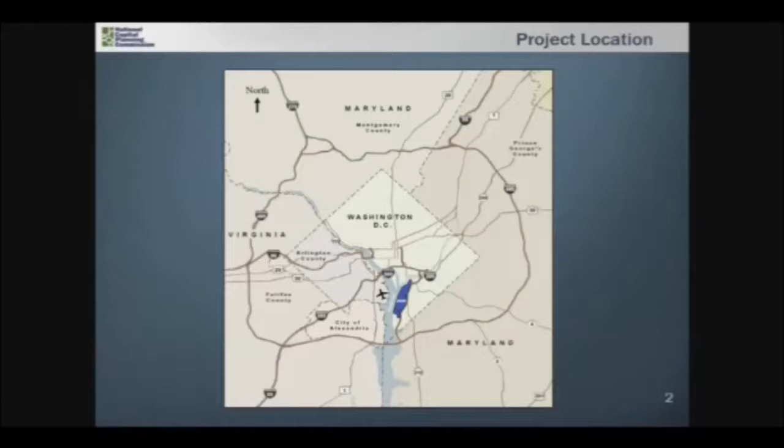The draft master plan was developed from the Long Range 2035 Regionally Integrated Master Program, also called RIMP. The RIMP was developed by the Naval District Washington in 2009 to provide an integrated set of regional strategies for its installations throughout the National Capital Region. These long-term strategies form the foundation for each of the installation master plans currently undergoing development and currently in various stages of NCPC review.

So the master plan starts out with a vision statement to serve as a premier installation, providing superior customer service and administrative mission support for DoD activities in the National Capital Region and worldwide, and also to evolve the installation into a more sustainable community.

The master plan is based on multiple guiding principles for sustainability, including compact development, multimodal circulation, energy conservation, and sustainable landscapes. And these sustainable principles are based on the Unified Facilities Criteria for Master Planning, NCPC guidelines, and other various federal mandates related to climate change, stormwater management, and sustainability under Executive Order 13514 and the 2007 Energy Independence and Security Act.

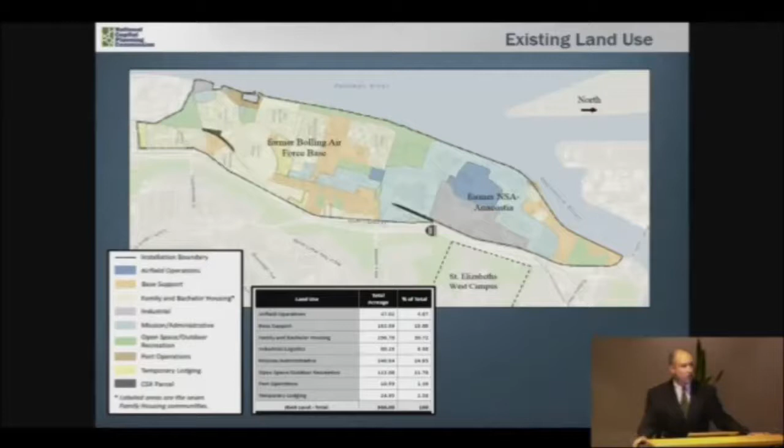The installation was merged back in 2010 pursuant to a 2005 Base Realignment and Closure Act. It's made up of the former NSA Anacostia, which was located in the northern portion of the installation, and the southern portion of the installation was the former Bolling Air Force Base. And so those 2 discrete installations merged, forming Joint Base Anacostia Bolling.

So in terms of actually accessing the installation, there are 5 gates. The northernmost gate is known as North Gate, located in the vicinity of the South Capitol Street Bridge. Currently, that gate is not operational. Moving south, there's Firth Sterling Gate, which is for employee use only, currently during business hours, 7 days a week. Arnold Gate, which is considered to be the main gate, is used for employees only, 24 hours, 7 days a week. The South Gate is for use by employees and visitors, including commercial vehicle traffic.

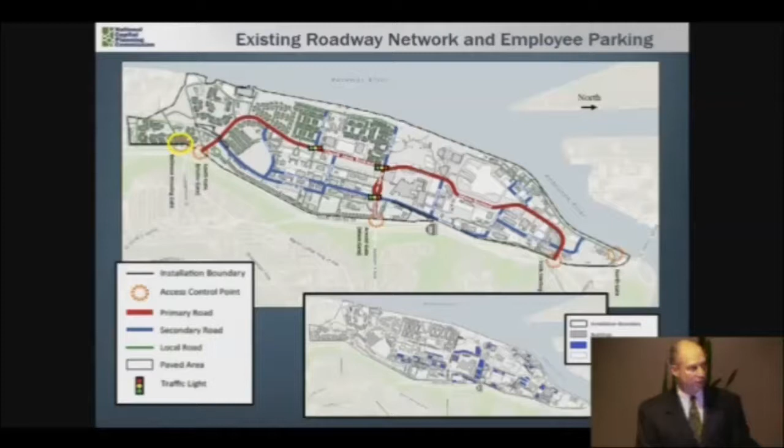And the very southernmost gate is for visitor and residential use, providing access to the privatized Bellevue housing complex, which makes up the very southern portion of the installation.

In terms of existing transit, currently there are 6 or 7 transit routes that provide service throughout the installation, operated by the Navy and various other tenants on the installation. These routes also provide service between the installation and several off-site locations, including the Anacostia Metro Rail Station, the Navy Yard, and the Pentagon.

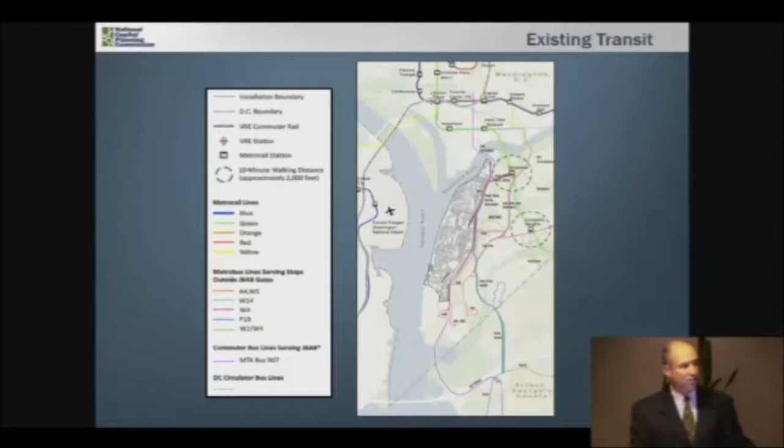Outside of the installation, there are several Metro bus routes with stops along the installation's edge at several of its gates. The 2 local Metro rail stations are Anacostia, which is located approximately a half-mile up Firth Sterling Avenue from that gate, and Congress Heights Metro Rail Station, located approximately 1.5 miles to the east of Arnold Gate.

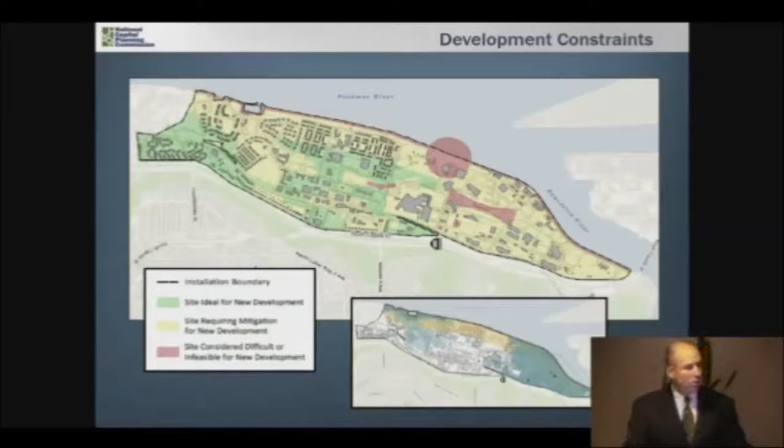A little more planning context. JBAB's current employee population is listed at 13,811 employees. The master plan assumes this employee population will not increase over the next five years. JBAB currently has 8,259 employee parking spaces, giving the installation a current overall parking ratio of 1 to 1.67.

Part of the need for the master plan was that the waterfront levee is currently in need of rehabilitation and recertification. One of the things the master plan seeks to do is get attention for that potential future project, which is currently unfunded. However, that is listed in the next five years, and you'll see that in a later slide.

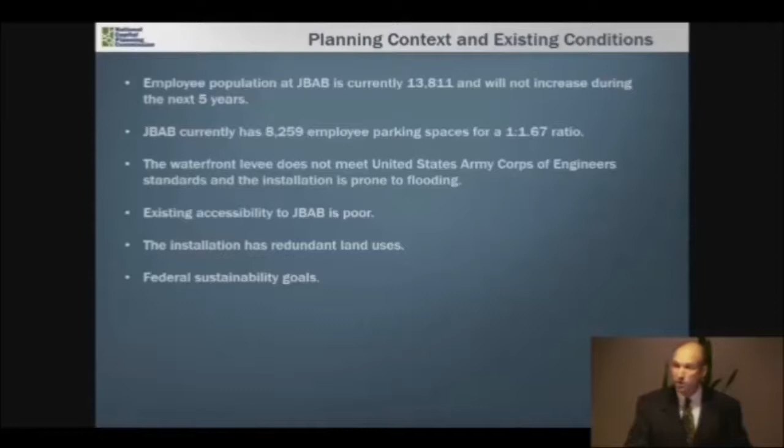Another issue facing the installation is that its land uses can be made more efficient. There are several redundant land uses between the north and south portions of the installation, reflective of the previous separate discrete installations that were merged together. One of the things the master plan seeks to do is eliminate that redundancy in the land uses.

And lastly, there are several federal sustainability goals coming up, and the master plan is designed to help the installation attain those various sustainability goals.

So as I mentioned earlier, there are two components to the master plan. I'll start with the shorter-term five-year development program first. The master plan shows a series of future demolition and construction projects over the next five years.

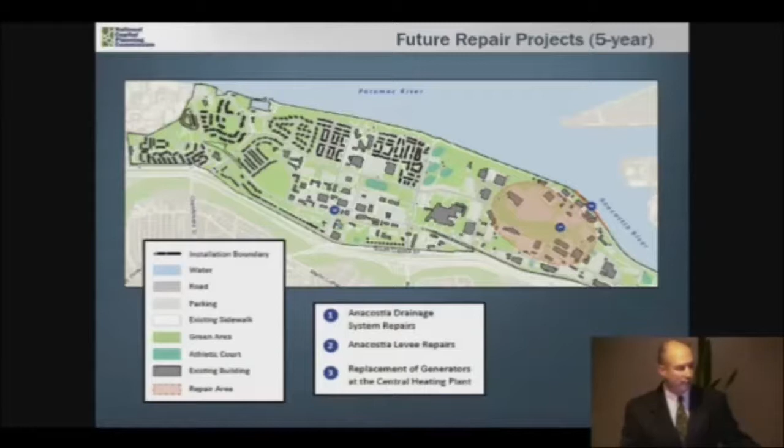The master plan shows a 10% reduction in employee parking over the next five years, which would improve the parking ratio from 1.67 to 1.86.

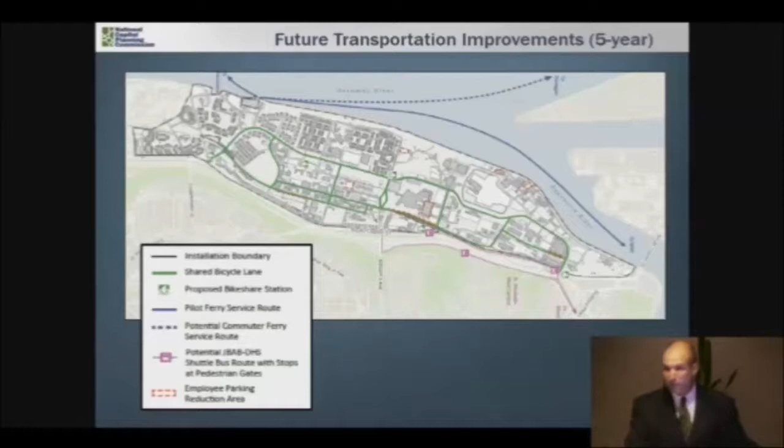The master plan lists a number of short-term five-year transit improvements, including a shared bicycle lane network, several proposed bike share stations, a pilot ferry service that would dock at the JBAB Marina, and also a potential future shared shuttle route between St. Elizabeth's and JBAB and the nearby Anacostia Metro Rail Station.

Now I'll go through several key features of this future land use plan. As I mentioned previously, there are a number of mixed-use areas, intended to make it easier to locate uses together that will help improve local connectivity on the installation and promote biking, walking, and transit use.

The land use framework plan shows a central development focus area in an attempt to densify and increase the mix of uses around the installation's existing central business district. The land use plan also reflects a 200 to 300 foot wide waterfront open space greenway extending from the very northern tip of the installation, adjacent to the South Capitol Street Bridge, all the way down to the JBAB Marina.

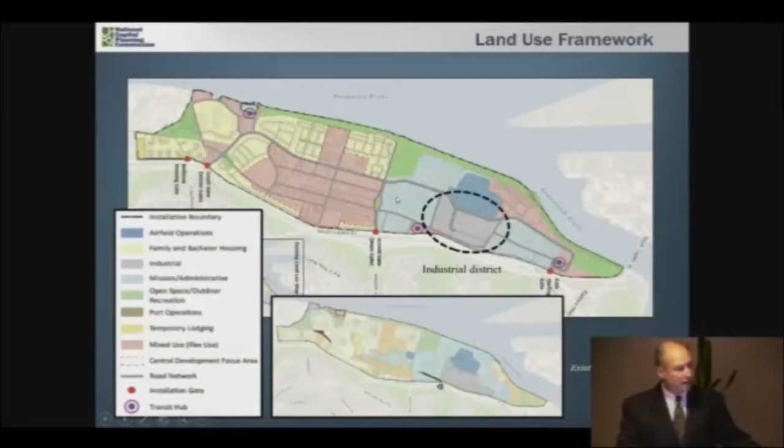There's a consolidated industrial district, and consolidated housing in the north.

In terms of the framework plan's access and circulation framework, there are a number of strategies included in the plan. The first strategy is to improve the installation's interface with its surrounding neighborhood, with four planned, unfunded gate improvement projects in the long-term framework plan component.

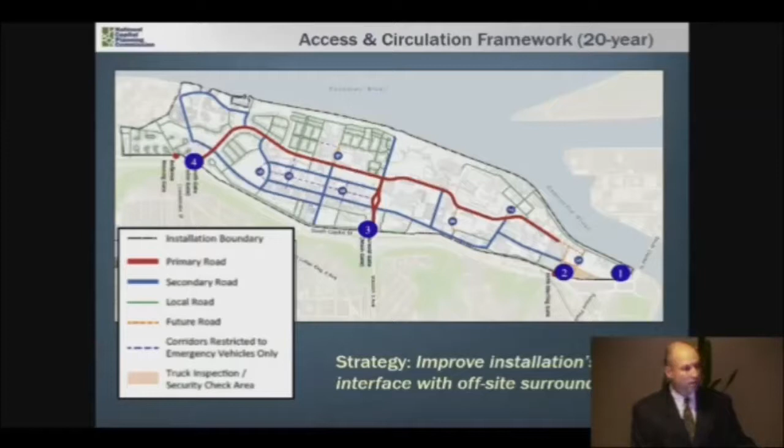The plan includes a strategy to strengthen the internal roadway network into more of a grid pattern, and the master plan reflects this attempt through a series of four roadway extension projects. The intent is to improve east-west accessibility on the installation, waterfront access, and make it more pedestrian and bicycle friendly. The last strategy included in access and circulation is to restrict vehicular access along several routes to bicycles and pedestrians only throughout the central development focus area, to improve urban design and walkability.

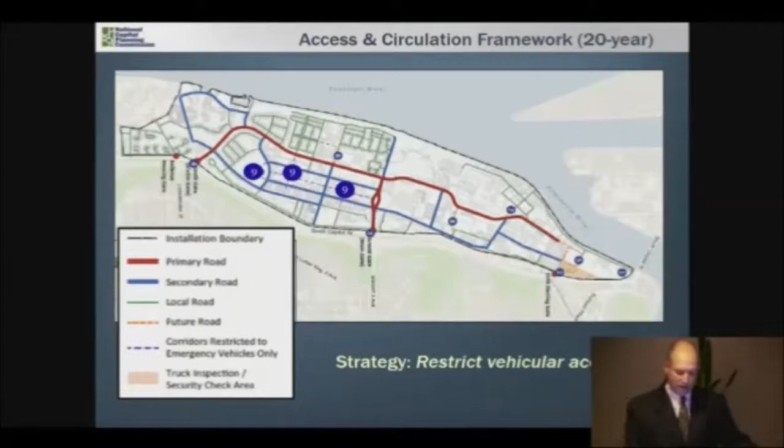The 20-year framework plan includes a multimodal circulation component. This not only includes the previously mentioned 5-year projects, it also adds DC streetcar service, potential ferry water taxi service which would dock at the JBAB Marina, and a much more robust potential internal shuttle service operating at 15 to 30-minute headways. This multimodal circulation component shows three identified multimodal transit hubs to improve mobility and accessibility throughout the installation and between the installation and the surrounding neighborhood and city.

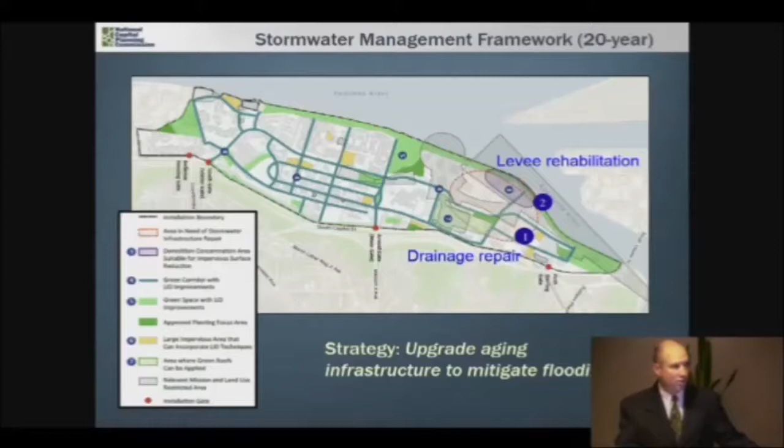The stormwater management installation-wide component includes a number of strategies to upgrade the aging infrastructure found in the southern portion of the installation, by repairing the underground sewer and stormwater system and rehabilitating and recertifying the levee. It includes a strategy to promote a more integrated natural system with green infrastructure consisting of green streetscapes, retrofitting large parking areas with low-impact development features, relocating some existing buildings currently located close to the waterfront further inland, and possibly retrofitting some larger industrial buildings with green roofs, as shown by number 7.

In terms of open space and outdoor recreation, this component includes strategies to be implemented by specific planned long-term projects: creating a green space area in the very southern portion of the installation, reconnecting the levee trail so it's a continual trail all the way from the northern portion of the installation down to the marina, and enhancing a network of streetscapes to encourage walking and biking throughout the installation.

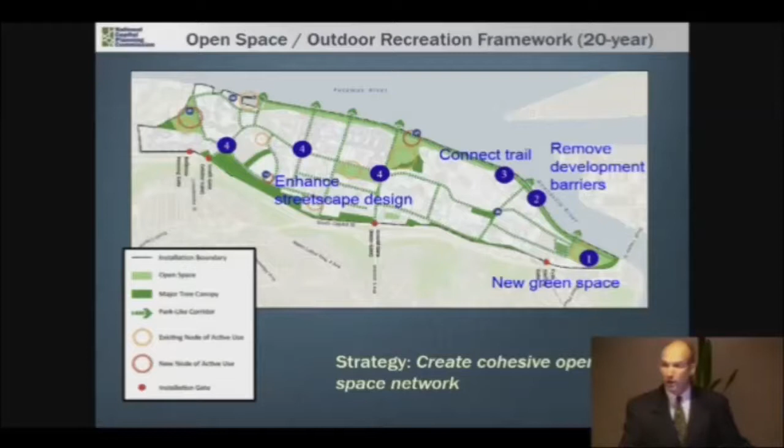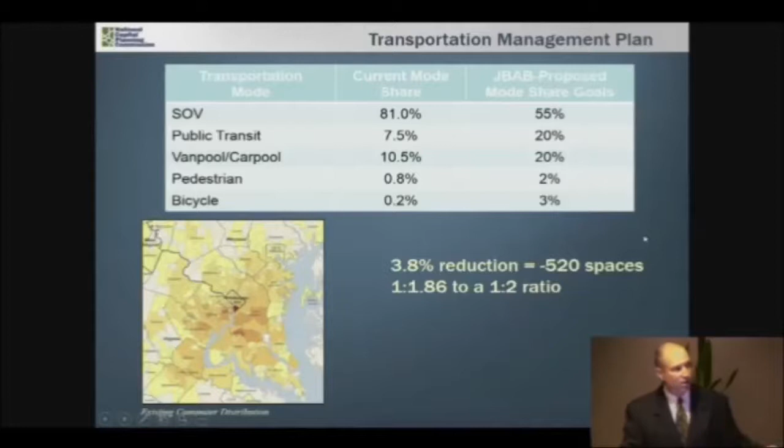So the master plan submission included a draft transportation management plan. The TMP proposes a long-term one-to-two parking ratio goal for employees. The TMP shows a number of existing mode shares for JBAB employees. You can see that a vast majority of JBAB employees currently commute using single occupant vehicles due to the spread of where JBAB employees live throughout the region. The TMP proposes a series of mode share goals in order to attain a long-term one-to-two employee parking ratio. For example, the TMP proposes to reduce the 81% SOV mode share down to 55% and to increase all the other non-SOV mode shares.

Staff analyzed the TMP and master plan. NCPC has review authority over the master plan pursuant to the National Capital Planning Act. Staff used the NCPC comprehensive plan as a tool to weigh the master plan and TMP against these comprehensive plan elements, and staff divided its analysis into three different categories.

The first set of my analysis will address the master plan's organization and structure. The second portion will address the short-term component. And the third portion will address the longer-term 20-year component. Just to give you a heads up, the executive director's recommendation follows this same structure, categorized using these three different groupings.

So staff strongly supports the master plan organization in its two component parts: a shorter term 5-year component, which includes funded and soon to be funded, likely to be funded projects, as well as a longer term 20-year component to provide guidance for the shorter term development program. Staff also supports the general framework plan strategies, many of which are based on these sustainable strategies shown before you.

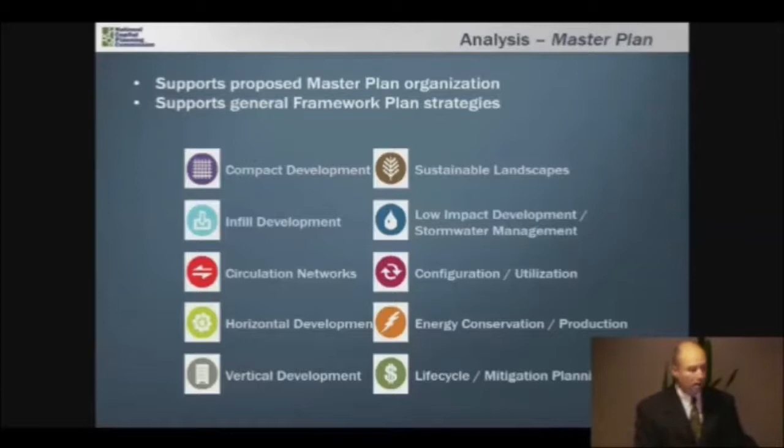In terms of the development program, staff notes a zero growth employee population assumption. Staff notes that the master plan proposes a 10% employee parking reduction in the short-term 5-year component, and that this short-term component does include both funded and likely to be funded projects.

Lastly, staff strongly supports the reconstruction and recertification of the waterfront levee, since it has a big impact to future costs of future development on the installation.

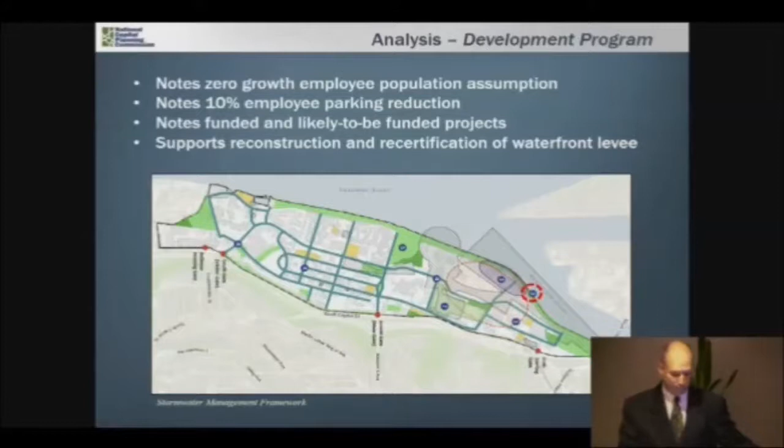In terms of the longer-term framework plan, staff strongly supports many of the strategies, including the establishment of a 200 to 300 foot wide waterfront buffer area, establishing a central development focus area, establishing an area set aside for community gardens, and the master plan and TMP both include a number of comprehensive travel demand management strategies and programs. There were a number of other elements as well that staff really recognized, leading to a fairly strong master plan.

However, staff does not support the proposed TMP's long-term 1-to-2 employee parking space ratio, based on a number of reasons.

This part of the city has a lot of planned developments and planned transportation improvements, and so staff did not feel it appropriate to relax the NCPC recommended 1-to-4 employee parking ratio for this part of the city, and allow the master plan TMP to use a 1-to-2 long-term parking ratio goal.

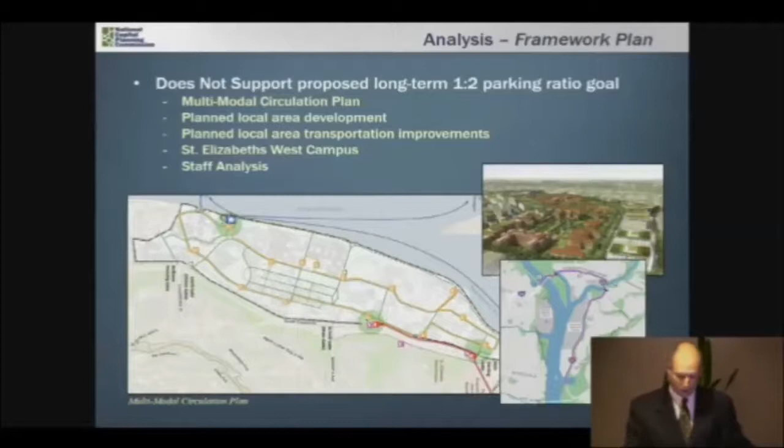Staff had felt it appropriate to include several requests to the Navy regarding the framework plan. Number one, in support of further reducing employee parking, staff felt one potential action that could be taken is to remove all the employee parking throughout the central development focus area, not only to work towards the 1-to-4 parking ratio, but also to improve potential developable area, and also improve the urban design and reinforce the walkability and bikeability of that area.

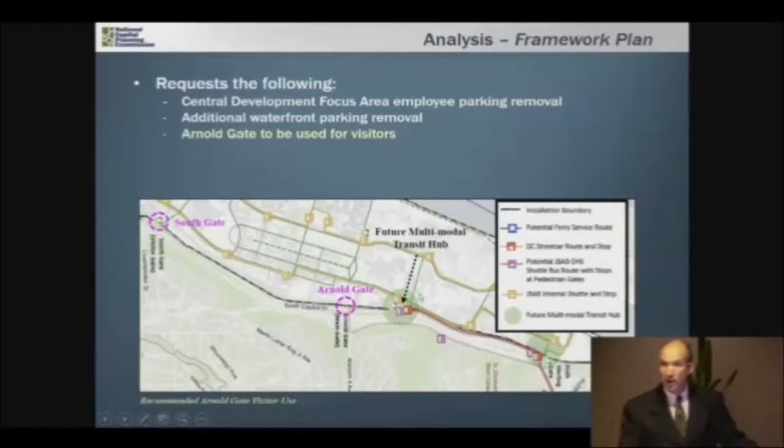Number two, staff felt it appropriate to request that the additional waterfront lot located in the extreme southwest portion of the installation be removed, to further help reduce impervious surface on the installation, and also to further expand the waterfront open space area. And lastly, staff requests that the Arnold Gate be used for visitors in the future rather than South Gate, due to the gate's better proximity to a future proposed multimodal transit hub and DC streetcar service.

Lastly, staff recommends regarding the framework plan, noting that the master plan proposes to relocate the commercial vehicle inspection operation from where it exists today down at the South Gate, adjacent to the Firth Sterling Gate. Staff recognizes that would likely result in an increase of commercial vehicular traffic through that gate, and recognizing that there's a major access point to the St. Elizabeth's campus located right here, a short way up Firth Sterling Avenue.

Staff feels that it's very, very important to continue coordination of this planned project with St. Elizabeth's, GSA, NCPC, and JBAB. Staff also would like to request the Navy continue its travel demand management efforts in trying to attain a longer-term 1-to-4 parking ratio, and recognizes that as a team effort, a coordination effort should include WMATA, DDOT, St. Elizabeth's and GSA, NCPC, and the Naval Research Laboratory.

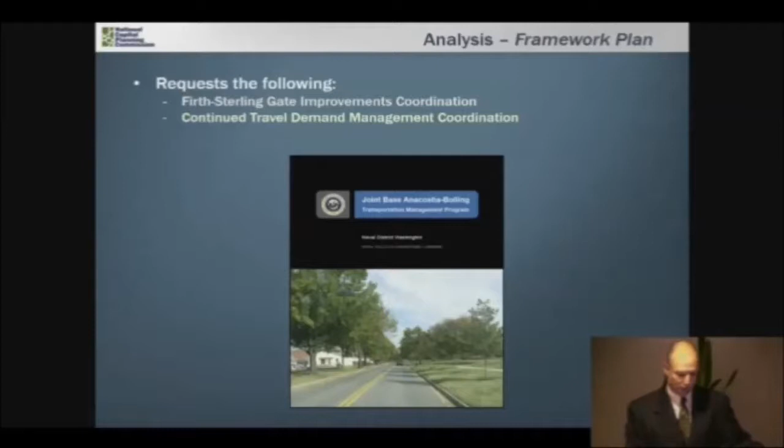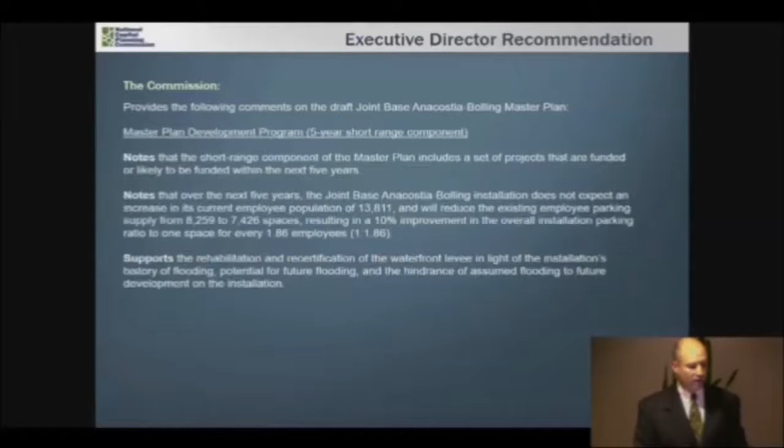So here's the actual executive director's recommendation. I'll kind of fly through these if you don't mind. These are, again, divided up into the same categories. Basically, the executive director supports the overarching organization of the master plan into a short-term 5-year and 20-year component, and also requests continued coordination between the Navy and NCPC from here on into the future.

Staff notes the short-term component includes funded and likely to be funded projects. The executive director notes that the master plan is based on a 0 employee population growth assumption, and that the master plan will work to reduce employee parking by approximately 10% over the short term. Furthermore, the executive director supports the rehab and recertification of the waterfront levee in light of the installation's history of flooding.

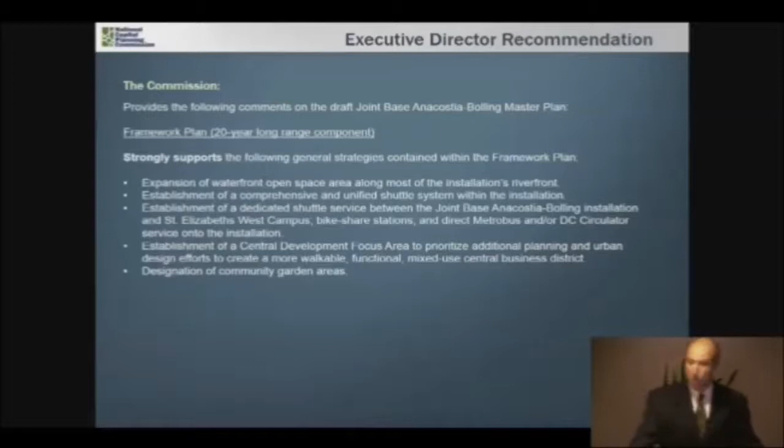The executive director strongly supports the following general strategies to highlight the master plan and its comprehensive nature, including the expansion of the waterfront open space area, establishment of a comprehensive and unified shuttle system within the installation, the establishment of a central development focus area, designation of community gardens areas, and a number of TDM programs, including bike share stations and direct Metrobus and/or DC Circulator service actually onto the installation.

The executive director does not support the proposed parking ratio of 1 to 2 employee spaces, since the master plan and TMP do not justify deviation from the transportation elements prescribed 1 to 4 long-term parking ratio goal.

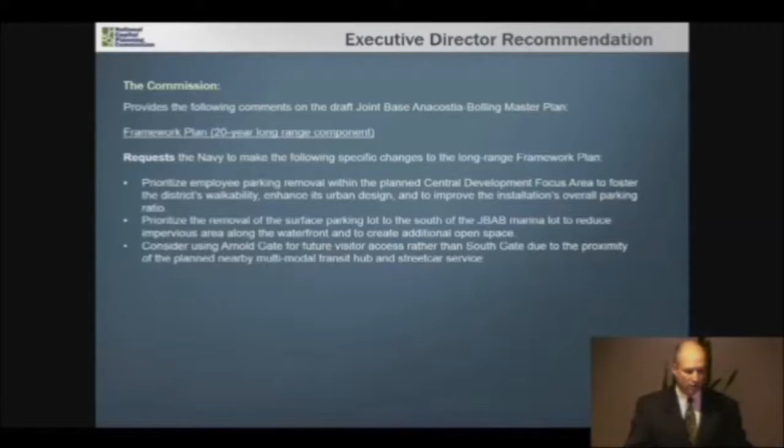The executive director requests the Navy make the following specific changes to the long-range framework plan: to consider using Arnold Gate for visitor access rather than the South Gate, to prioritize removal of the parking lot in the southwest portion of the installation, as well as employee parking throughout the central development focus area.

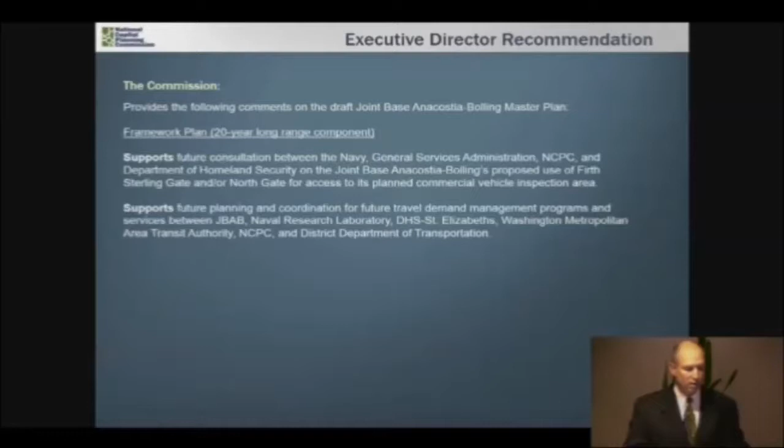And the executive director supports future consultation regarding the potential relocation of the truck inspection facility between the Navy, GSA, NCPC, and St. Elizabeth's. And the executive director supports future planning and coordination for future travel demand management programs and services between JBAB, the Naval Research Laboratory, St. Elizabeth's, Washington Metropolitan Area Transit Authority, NCPC, and DDOT.

And that concludes my presentation. I'm available for questions, and I believe JBAB has representation here as well.

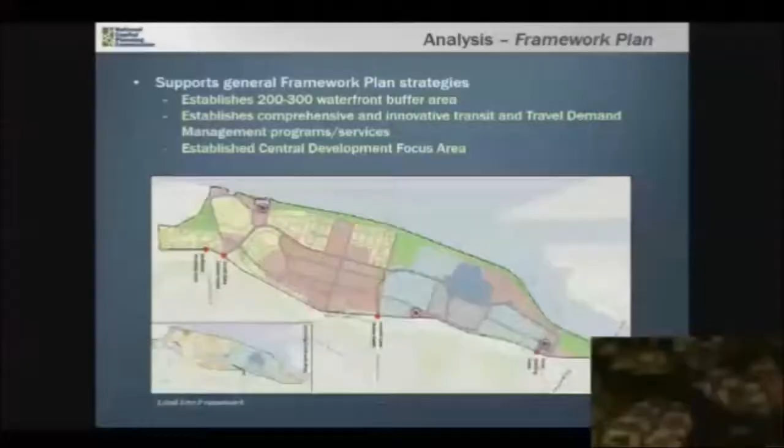Yeah, it's right next to the base. I believe that test line will be incorporated and extended up, included in the streetcar network. And you're right, it crosses South Capitol Street. Show that on the map, so it's easier. The test line definitely crosses South Capitol and goes right along the fence line. In fact, we put in a request to increase the height of the fence for security reasons, a real estate action. And then there's an easement associated with it which we're working through right now.

That's helpful to see. One thing I noted in my review of this report is there's a lot of color that would have been very helpful to see when we reviewed it. It was very hard to review in black and white, so that's a note for staff for future discussions—this color could be brighter. That's true, but this is better than what we have in our black and white.

So are we seeing it there in the lower right where it's coming across along Firth Sterling? Yes, sir, right here. It comes across, and then it goes down to about there, and just dead ends. It's not a station necessarily right there, but it is coming along there, which is why we needed the fence a little bit higher.

So I'm curious about what the ultimate plan is for the streetcar in that area. I know the immediate future of the streetcar is somewhat in question, given the funding situation in the district, although the dust hasn't settled on that yet. But I'd be curious whether it's envisioned that the line would actually extend that far down. I think that would be highly beneficial, given the number of people who work there.

By the way, Lieutenant Colonel, I'm sorry, I missed your name. Kristen Bakotic? Bakotic. So I'm curious, is this your actual workstation? You work on the base? I do, yes, sir. And how do you commute from Capitol Hill? When it's nice out, I actually ride my bike. Excellent, I was hoping for that answer.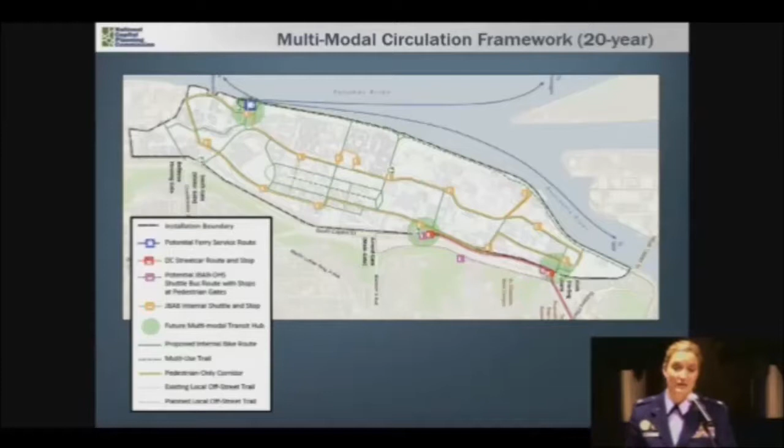I'm a huge proponent of it. It's just a matter of hopefully some of that community development right outside the gate continuing to improve over the next few years. And if we get that bike lane extended down South Capitol, I think it'll be a huge help as well. And I know Berry Farm is teeing up for redevelopment shortly, so that'll be a big improvement.

I've tried to do the crossing on South Capitol Street Bridge, which is not very good. But do you come by 11th Street? Because that is a better crossing. I do both, yes sir. And of course, the 11th Street gives you the opportunity of going through the park as well.

I'll also comment on the path, the trail along the Navy Yard that connects to the stadium, which I rode very recently. It's a great thing to have, but it is tough on bikes at the moment because it's an uneven surface with lots of gaps, and if you're not really watching, you can easily get a wheel stuck in those gaps. That's not your domain, but I think that's the next one.

Right, over to you, Rich. I think that's all I had to say. Thank you very much, I appreciate it. The thing that concerns me most is the levee follow-up. Copy that, I appreciate it. Ms. McCarthy, and then Mr. Provenza.

I was thinking along the same lines as Mr. Hardin, but wondering even more broadly, how realistic is it to even plan on increased investment in this area, given that so much of it is already in the 100-year floodplain at current water levels, with such alarming projections on the effects of climate change? Does it make sense to retain a secure facility here so close to the possibility of being flooded? It's an Air Force base without an airstrip, a Navy base without an airstrip, and without any major docking station. There doesn't seem to be an integral military reason to have it there. Given the hazards, potential loss of investment, and potential loss of life, is it really worth continuing to invest here, or should we think about moving it?

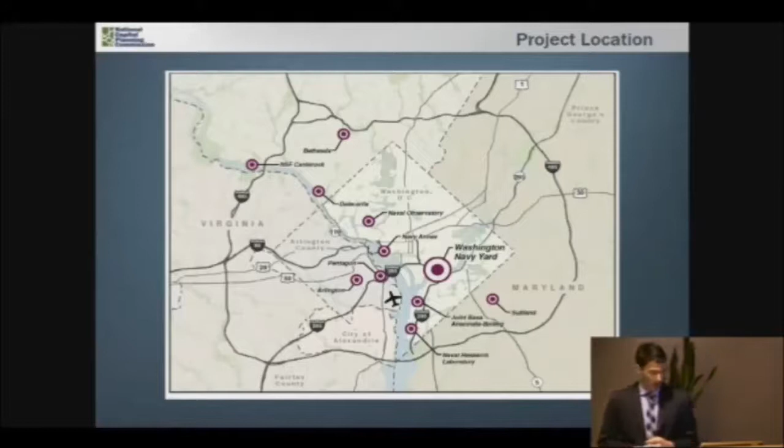You can also see on this map several other dots noting the location of other naval installations, which, as you know, the Navy is undergoing a region-wide installation master planning process, updating several installation master plans throughout the region. Each is informed by a much larger region-wide integrated master programming exercise called the RIMP, which informs individual strategies at the installation level.

Over time, the function, mission, and size of the Navy Yard has evolved substantially since its original inception in the late 1700s. Initially, it was established as a shipbuilding yard and maintenance facility, transitioning over time to a production facility during World War I, research and testing during World War II, and then following World War II beginning its evolution into a large administrative center.

I noted that the Navy Yard at one time was much larger, encompassing the area immediately to the west, which is currently under redevelopment. But in 1962, it was determined that much land was no longer necessary for the function of the Navy Yard, and that portion was declared surplus to the General Services Administration.

Since the 1970s, the Navy Yard has taken on a lot of administrative office space. Beginning in the 1970s, there was a big effort to consolidate lease space onto federally owned land, as noted in the last presentation, and the Navy Yard was one of the installations that received a lot of that office space. In addition, multiple rounds of BRAC also resulted in several employees and a lot of office space being located to the Navy Yard.

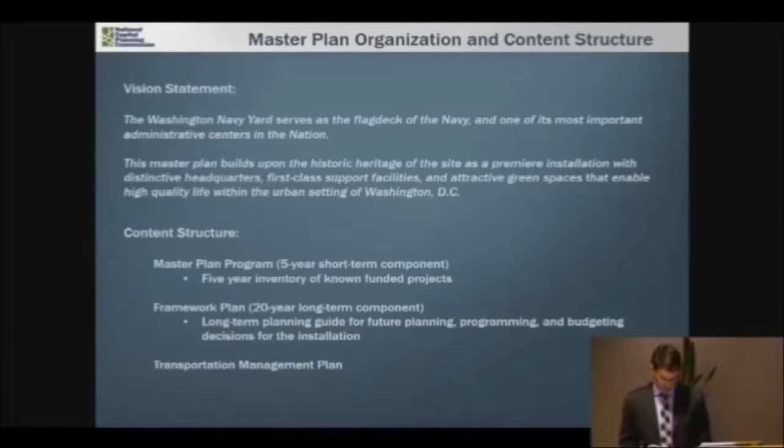The Navy Yard Master Plan is based on the same set of 10 guiding principles as the JBAB Master Plan, so I won't go through those again, as you've already been presented them.

With regard to the overall Master Plan organization and content structure, you'll note in our EDR that staff is very supportive of this. We think the 5-year short-term component gives the Commission a good idea of what to expect in terms of specific projects coming forward for review. And the long-term component provides the commission with a really good overall context with regard to the long-term vision for the Navy Yard and how it'll guide future planning and budgeting decisions.

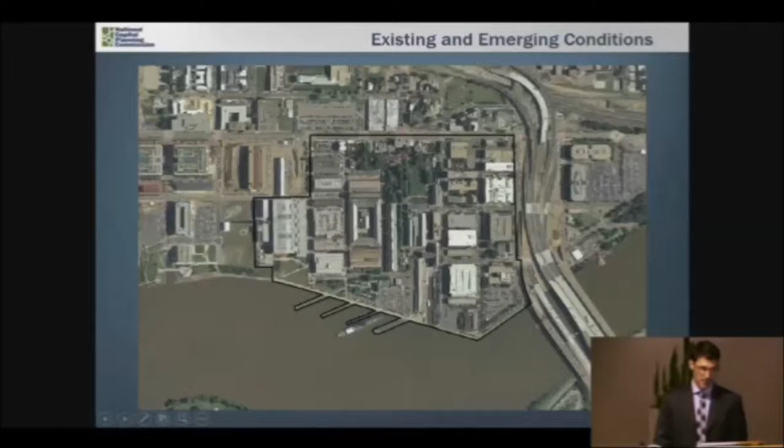Generally speaking about the surrounding development pattern of the neighborhood, the surrounding neighborhood is evolving substantially. A large mixed-use neighborhood is being developed to the west. You have Capitol Hill immediately to the north, and to the east, there's some development going on by Maritime Plaza for some conference space and hotel space that'll be located at the foot of Virginia Avenue.

Currently the Navy Yard is primarily an administrative center. Administrative office space composes the largest percentage of land area at the Navy Yard, being approximately 35 or 36 of the 79 acres that make up the base, approximately 46% of the installation.

Other large land uses on the installation include parking, approximately 12 acres or 16% of the installation, spread across 3 parking garages, one on the east, one on the west, and building 405 down in the southeast, as well as a collection of surface parking lots down along the southern boundary of the installation. Parks and open space also make up a fairly high component of the Navy Yard, 9 acres or approximately 12% of the installation.

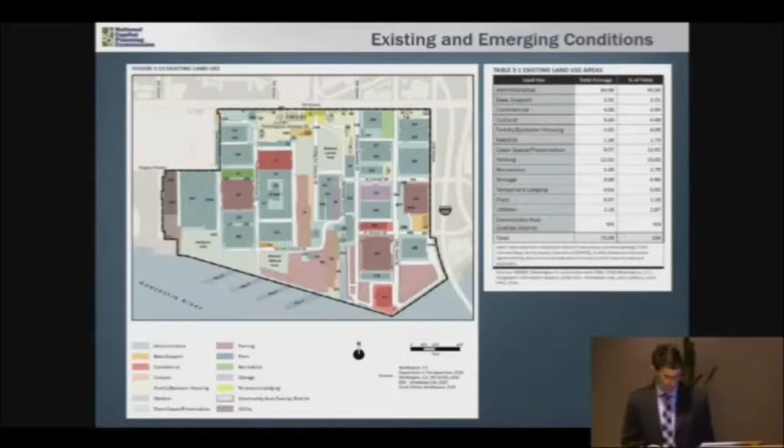In addition, there's a fairly large cultural component that exists on the Navy Yard. The United States National Museum of the U.S. Navy exists in the central portion of the Navy Yard in Building 76, Building 70, and a collection of administrative buildings that serve as support space and storage space for the Navy Museum.

In terms of existing transportation and vehicular circulation across the installation, there's a fairly regular grid network that provides vehicular and pedestrian circulation throughout the installation. In terms of parking, you can see here the 3 parking garages that exist on the base. In total, there's approximately 5,000 parking spaces on the base, of which about 4,777 are set aside for employee parking, and 3,600 total are located in the existing parking garages.

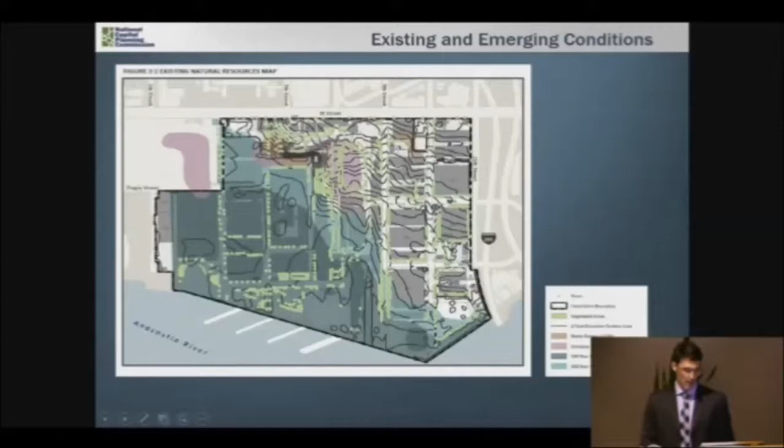Here's just another look at an aerial photo showing the relationship of the installation to the topography that exists on the site, as well as the 100-year floodplain shown here in blue.

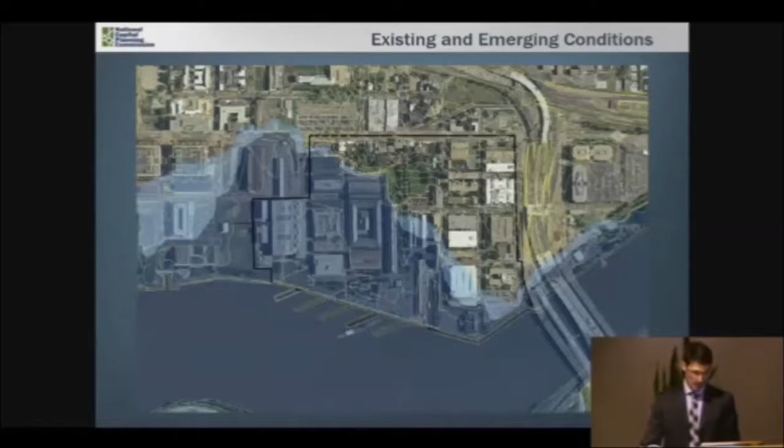It's a very old facility, and understandably so, it's a very historic facility. The entire installation is covered by 3 separate historic districts, with the oldest historic district and oldest building stock located in the Central Yard area, with the Eastern Historic District as well as the Western Historic District, which were later additions.

Many of the existing buildings on the site are either contributing structures to the Historic District or individually listed in the National Register of Historic Places or eligible for listing.

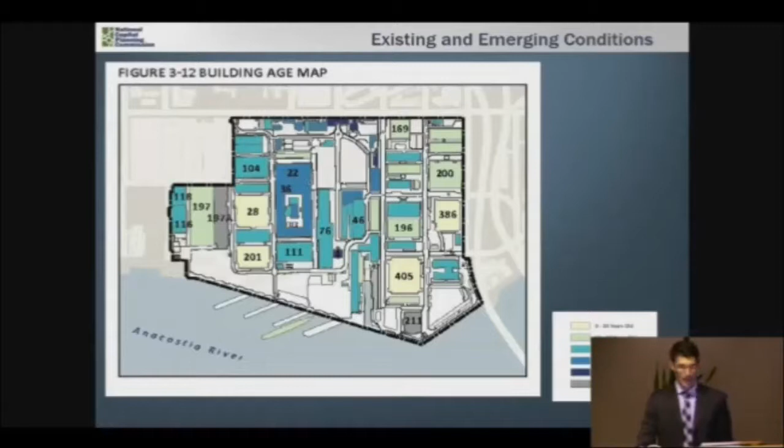In terms of building age, the highest percentage of buildings at the base range between 81 and 115 years old, with the oldest buildings being located again in the central portion of the base, with an average age range of 93 years.

And with regard to heights, building height across the base is fairly uniform and modest, with approximately 75% of the buildings either at or below 50 feet. The shortest buildings, again, are in the center portion of the installation, which are mainly 1 to 3 story offices, community uses, as well as residential structures, some of them located along M Street, including building number 2, which is the visiting flag quarters, known as the Latrobe Gate. You may be familiar with it at the terminus of 8th Street.

The tallest buildings are located out at the eastern and western perimeter of the site, largely being office buildings of about 4 to 6 stories high.

Before getting into some of the specific recommendations or proposals of the master plan, just to quickly go over some additional emerging conditions: currently, the employee population at the Navy Yard is about 18,000 employees, and it's growing, expected to grow in the long term due to consolidation and mission growth. Over the next 5 years, or the short-term timeframe, employee population is expected to grow by about 530 employees. It has approximately 4,700 employee parking spaces.

Naval District Washington is experiencing deficiencies in available conference and training facilities, and the existing short-term lodging throughout the region, including the Navy Yard, currently does not meet regional demand. And finally, public access to the existing National Museum of the U.S. Navy is limited due to security issues caused by its central location in the yard, as well as some recent events that have taken place at the Navy Yard.

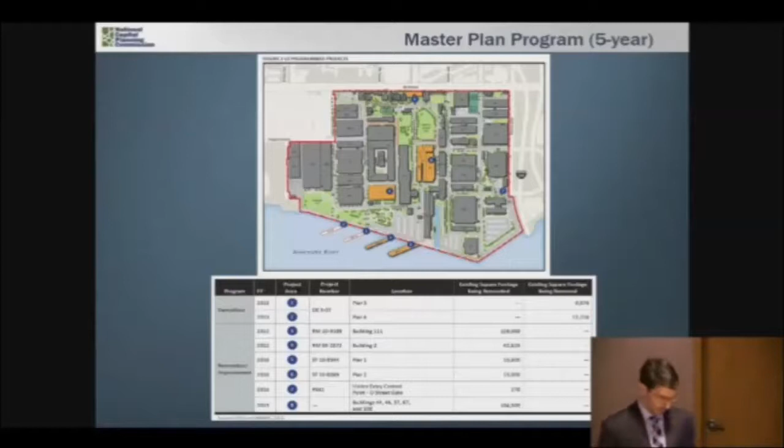Finally, with regard to our recommendation on this component, in light of the short-term improvements that are being made to the buildings that currently house support functions and exhibit space and storage space for the U.S. Navy Museum, also in light of the public access limitations to this important cultural use, and the deficiencies noted in the master plan with regard to administrative space and conference space, staff is recommending that the commission ask for information known to date from the Navy on its long-term plans for improving access in terms of location of the U.S. Navy Museum, whether or not they're contemplating an off-site location, another more secure location on the installation.

Moving into the long-term 20-year framework plan for the draft master plan, staff will note that there are several very good strategies contained inside the long-term framework plan that support or are consistent with several policies inside the comprehensive plan related to the maintenance or improvement of the quality of the workplace environment, preservation and expansion of existing open spaces, rehabilitation and preservation of existing historic resources. A lot of good strategies, some of which I'll highlight as I take you through some of the components of the framework plan.

One of the overlays or strategies of the long-range component is this idea of maintaining and expanding upon some existing activity hubs that exist on the western side of the installation. Building 22 currently serves as kind of the town center, and it has a lot of retail amenities available to employees. And then there's the expansion of the range of amenities located down in the southeast portion of the installation. So we very much support the growing of the amenity set down in the southeast portion of the base. We think that area of the base has a lot of potential.

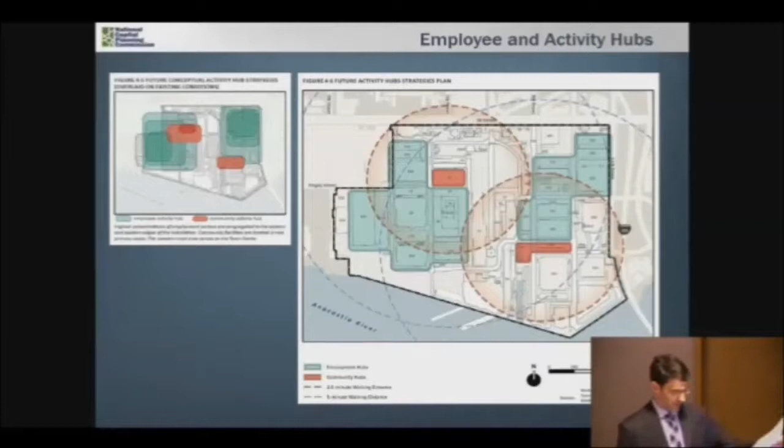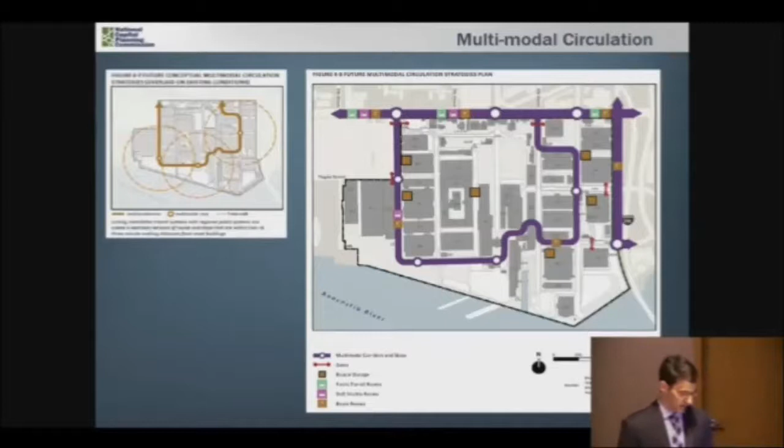There's a multimodal circulation plan which contains strategies for supporting alternative modes of transportation in terms of commuting back and forth from the installation, as a way to reduce the number of single occupancy vehicles coming to the installation. Some of the strategies they're proposing include an expansion of the existing shuttle service on the Washington Navy Yard, and possibly in the long term providing direct service back and forth between the Navy Yard and nearby metro rail stations. Also working with the city government to expand upon and add additional Capital Bikeshare facilities adjacent to the perimeter of the base, as well as the continuance or expansion of bicycle facilities such as covered storage inside parking garages and providing showers and lockers inside office buildings.

For vehicular circulation, there's not much you can do in terms of making changes to the existing network of streets. However, what's being proposed is a preservation of the two main loops that provide service into the base. The west loop, accessed by the Isaac Hull Gate, which is the main entrance to the facility, providing that loop on the western side of the installation with connections to the parking garage there. Then the eastern loop, providing access to the installation along 9th Street, at the N Street employee gate and the main visitors gate along O Street, and providing access to the dense administrative office space located there.

One of the strategies proposed in this particular component of the master plan that staff strongly supports is looking at the reuse of the Tingey Gate, which is currently closed to both pedestrian and vehicular traffic, repurposing that gate for pedestrian circulation in order to facilitate access to a lot of the amenities being brought online as part of the Yards development.

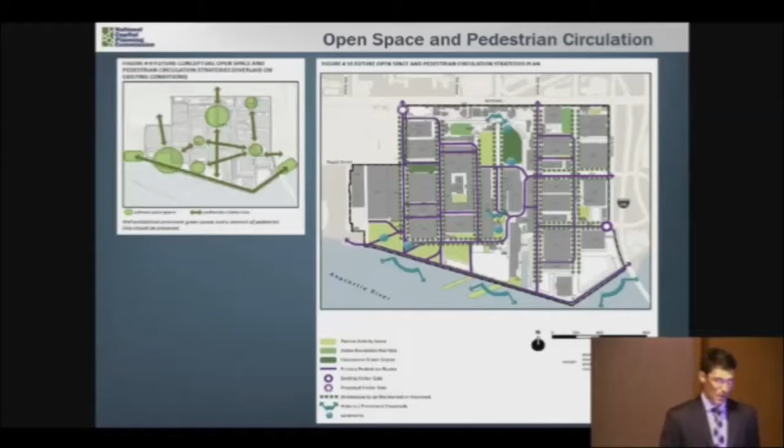The open space and pedestrian circulation plan looks at preserving existing open spaces, using them to serve an environmental function for stormwater management, particularly along the waterfront. It also continues public access to the Anacostia Riverwalk, preserves and enhances open spaces and pedestrian routes throughout the installation, and improves pedestrian circulation through consistent streetscape enhancements.

There are strategies proposed for sustainable energy production and stormwater management. The energy strategies look to potentially incorporate green roofs on some buildings in the northeast section of the installation to cut down energy consumption, and to expand demonstration projects currently in place on parking garage rooftops, mainly at Building 386, where a PV array and wind turbines provide energy to the main visitor center at the O Street gate.

For stormwater management, they're again looking to use existing open spaces to serve an environmental function. They've also identified potential for existing surface parking lots on the south side of the base for stormwater retention systems and other LID measures.

There's a 20-year long-range land use component which, compared to existing land uses, doesn't show too many changes. I'll note three of them. First, there are strategies to study expanding base support at the Isaac Hull Gate to provide additional visitor amenities, making it easier for visitors to reach their destination near the Metro Rail on M Street, rather than routing all visitors through the O Street Gate on the east side.

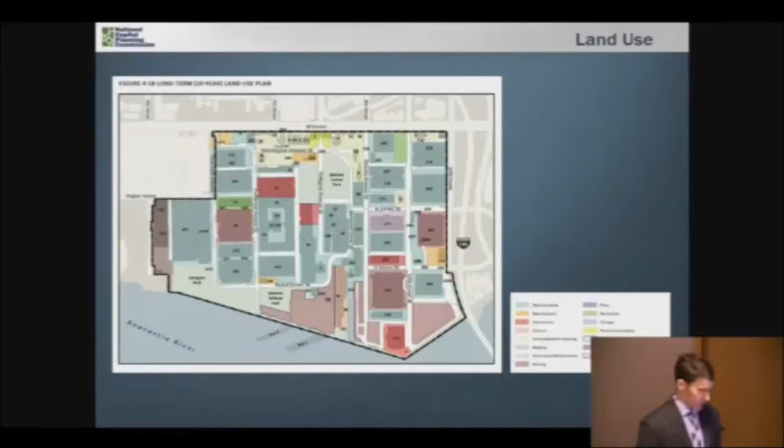This diagram shows those framework plan overlays compiled into one assembled framework plan.

There is a transportation management plan included with the master plan, which includes information from a region-wide transportation survey conducted across several naval installations. This is a zip code map of survey respondents from the Navy Yard. The survey had about 10,000 responses, of which approximately 3,300 were Navy Yard workers—this shows the zip code distribution of where those employees reside throughout the extended region.

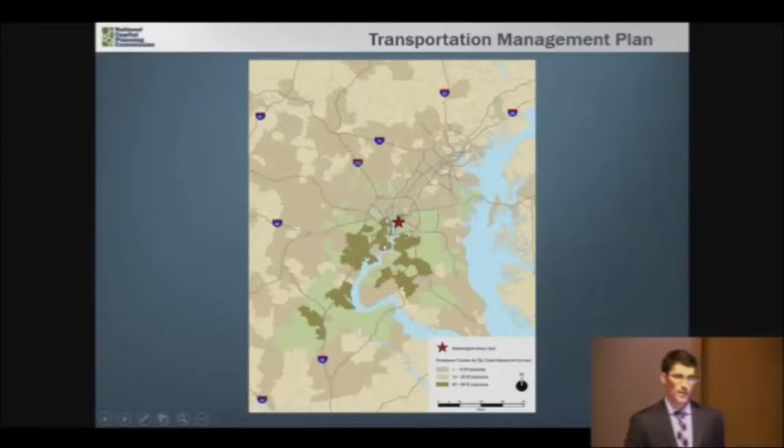The distribution of that employee population ranges from just north of Richmond all the way up into southern Pennsylvania, clustered just outside the Beltway south of Washington, D.C., and down along I-95.

In terms of transportation mode choice, the 3,300 respondents represent about 18% of the current Navy Yard population. Of those, approximately 45% commute by single occupancy vehicle, 17% ride Metro Rail, and the remaining percentage is spread across other modes such as commuter bus, circulator and Metro bus, shuttle bus, and carpool or vanpool.

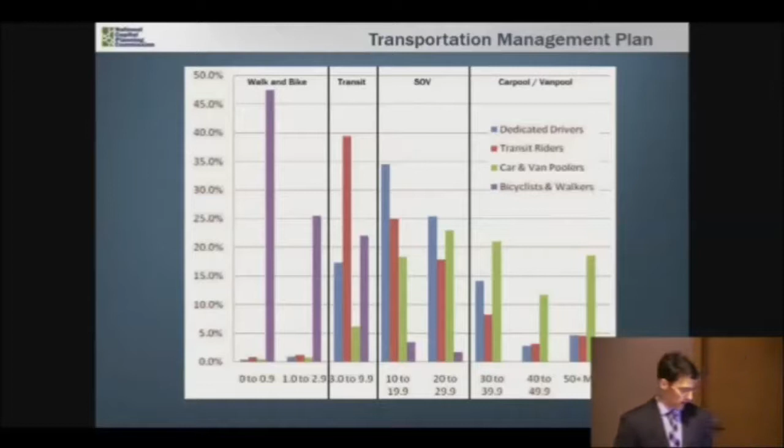There was a high correlation between mode choice and distance employees lived from the Navy Yard, which is fairly common. Respondents living 3 miles or less tend to walk or bike. Between 3 and 10 miles, employees choose transit. Between 10 and 30 miles, they primarily commute by single occupancy vehicle. Beyond 30 miles, there's a transition toward carpool and vanpool.

Also, as part of the master plan, the applicant is requesting a modified parking ratio for the Washington Navy Yard from what is currently prescribed in the comprehensive plan. Here in this diagram, you can see the outline of the Navy Yard, and in the red hatch area is the current boundary of DC's central employment area. According to the comprehensive plan, federal facilities located inside the central employment area are assigned a parking ratio of 1 space for every 5 employees.

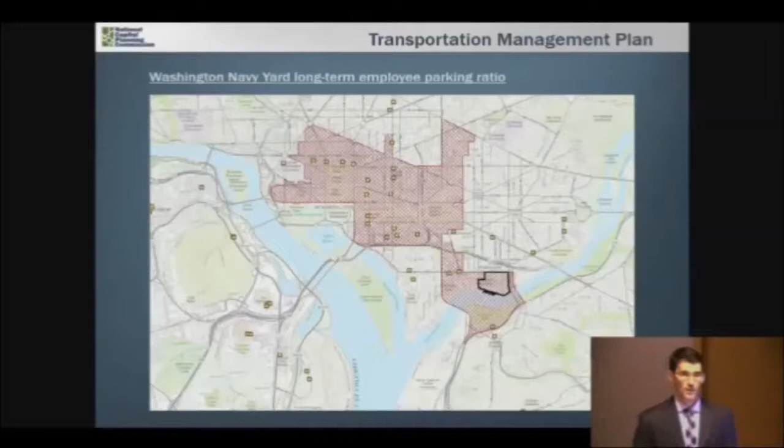I will note that the comprehensive plan does allow for flexibility in enforcement of the parking ratio based on certain circumstances of a federal facility. The Navy is requesting a modified parking ratio of 1 space for every 4 employees based on factors relating to the distance of the installation to Metro Rail, noting it's more characteristic of a federal facility located outside the central employment area, but still within the historic boundary of the District of Columbia, which carries a 1 space for every 4 employees ratio.

Noting that the adjacent area is not widely characterized as typical of a central business district, they provide information that sidewalks and traffic volume conditions along M Street create challenges to pedestrian circulation to the Navy Yard, particularly the narrow sidewalk condition close to the Navy Yard along the historic Navy Yard wall. Finally, the existing employee distribution would require a high percentage of 3 and potentially 4 seat commutes in order to meet the current comprehensive plan parking ratio.

They're also proposing an alternative method to calculating the employee parking ratio. Alternative 1 is the method typically used—basically calculating the ratio of total employee population to total parking supply and running that ratio.

The alternative they're proposing, Alternative 2, instead of calculating based on the entire supply of parking—SOV parking, carpool, vanpool parking, handicap parking—looks at it in terms of an SOV-only mode split format. So instead of creating a calculation including all spaces, they propose factoring out the carpool and vanpool spaces and looking at a survey: a 1-to-4 ratio would be a 25% SOV mode split, and if they could hit that 25% of their population commuting by SOV, they would meet the ratio.

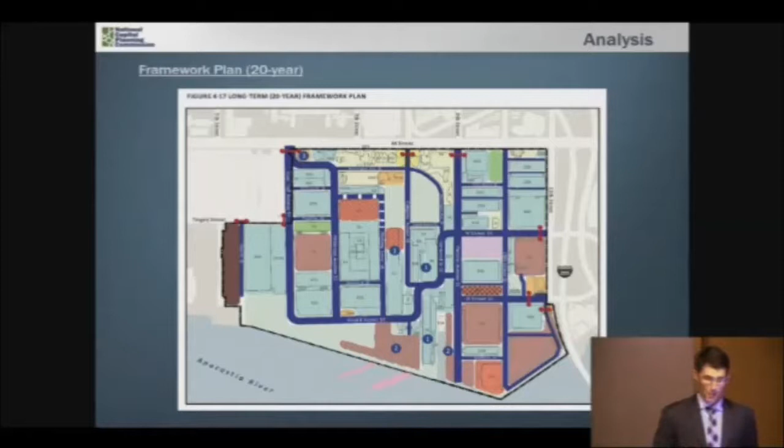As this is a draft, staff is requesting that the Navy work with NCPC staff to modify the framework plan and its associated strategies to provide greater certainty in regard to how the master plan will guide future planning, programming, and budgeting decisions of the Navy, and to give the Commission the sufficient context it needs to properly review specific projects.

In terms of specific changes that could be made to the master plan to address these issues, one is the commitment to establishing a 100-foot buffer along the shoreline so that in the long term, for example when parking lots along the south of the installation need to be resurfaced and the Navy is submitting funding for these projects, any impervious surface within that 100-foot buffer would be removed and incorporated into parks and open space or sustainable stormwater management, in order to help eliminate impervious surfaces along the waterfront and help the district's efforts to clean up the Anacostia River.

We also see opportunity for two specific improvements to the framework plan in terms of identifying a particular area for future development, in order to address some of its deficiencies in office space, conference space, or housing. Noting that the site is very constrained, any future development should be kept outside the 100-year floodplain.

We see opportunities in two areas. One is the designation of a small portion of the undeveloped space in the north area of the installation, just west of the historic parade ground, to address future needs for new development for administrative purposes or housing. We see this as beneficial in a couple ways: it's outside the floodplain and would also provide a fourth edge, starting to create a quad condition with the future or existing town center and the historic parade ground in that location.

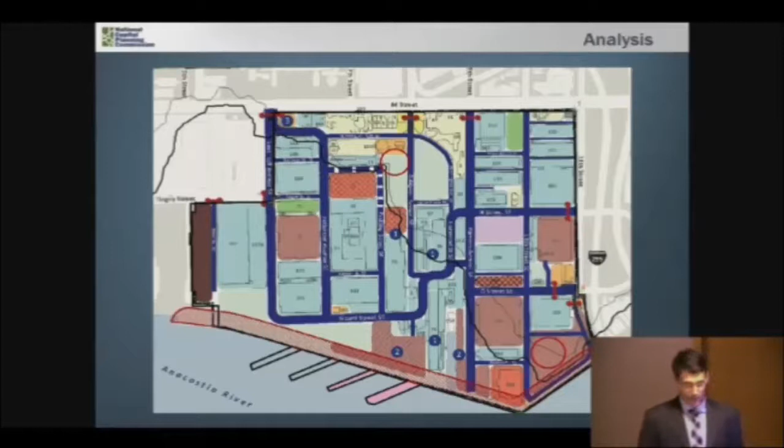And finally, the surface parking lot located south of Building 166, we think could present some opportunity for development in terms of either a future cultural use or administrative use. So we're looking at potentially designating a portion of that parking lot as a building site, outside of the floodplain and outside of that 100-foot buffer.

Lastly, we wanted to make a few points about the proposed modified 1-to-4 parking ratio. While staff is unable at this time to support the requested 1-to-4 based on certain location and operational characteristics of the Navy Yard, we are open to a slightly modified ratio, perhaps slightly below the assigned 1-to-5, if the Navy was able to make the changes I just described to the long-term framework plan.

In terms of the proposed SOV mode split alternative to achieving the parking ratio, we think that would be very difficult to reliably track and enforce. We also think it doesn't do anything to help control the supply of parking at the installation.

The comprehensive plan is very specific in stating that an available parking space at the work site is perhaps the most important factor in an employee choosing what mode of transportation to use. The current way of calculating the parking ratio does more than just establish a parking maximum on an installation; it also helps reduce the amount of land area used or improved with impervious surface just for purposes of parking.

We also don't think that the current way of calculating the parking ratio creates a disincentive to those choosing to carpool or vanpool. In fact, the TMP does a pretty good job of documenting, based on the 3,300 survey respondents, the disincentives to carpooling and vanpooling.

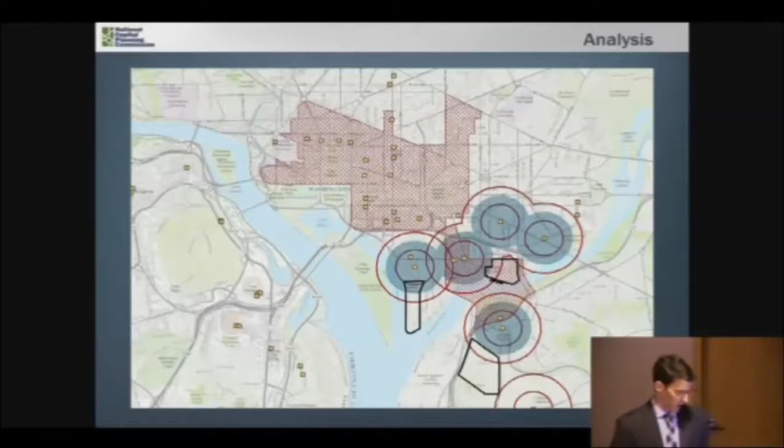For the 1-to-4 parking ratio, the comprehensive plan describes the area within the historic district boundary as well served by transit, but federal facilities tend to be between a quarter mile and a half mile from a Metro Rail station, with a walkable surrounding street network. So there's some credence to the idea that the Navy Yard falls in between federal installations in the CEA and those within the historic district boundary. The comprehensive plan does contemplate and allow flexibility in the parking ratio, and there's support here to consider something like that at the final master plan stage.

Mr. Chairman, I essentially gave you staff's recommendation as I was presenting the project, so in lieu of reading through the recommendation, I can incorporate by reference what's in the EDR and conclude my presentation at this time. I'm happy to answer any questions.

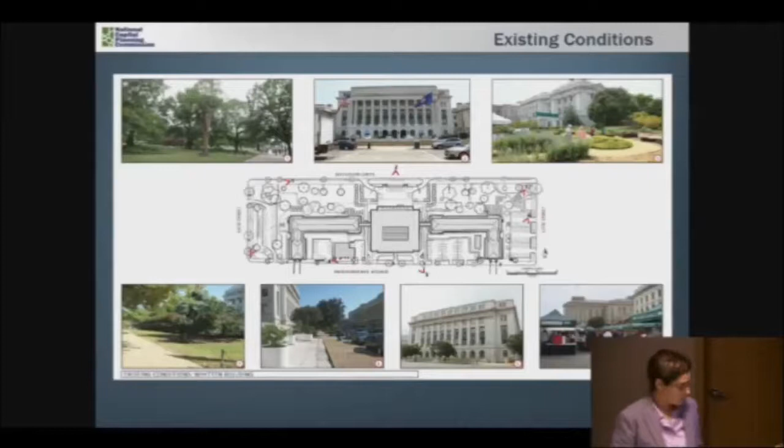Here you can see some existing conditions of the grounds at the Whitten Building, including the ceremonial court at the top center here, as well as the People's Garden and how the site is activated during the spring and summer months with a farmer's market.

The South Building was also constructed in phases in the 1930s and reflects a minimalist classical style of architecture. It was the largest office building in the world when it was constructed in the 1930s. These existing conditions photos include showing the bridges over Independence Avenue, along with the metro station at 12th and Independence, the bike share station, and the existing streetscape condition along C Street.

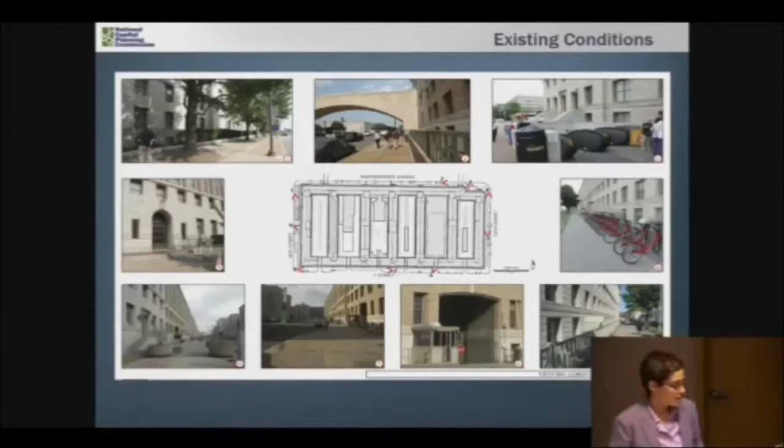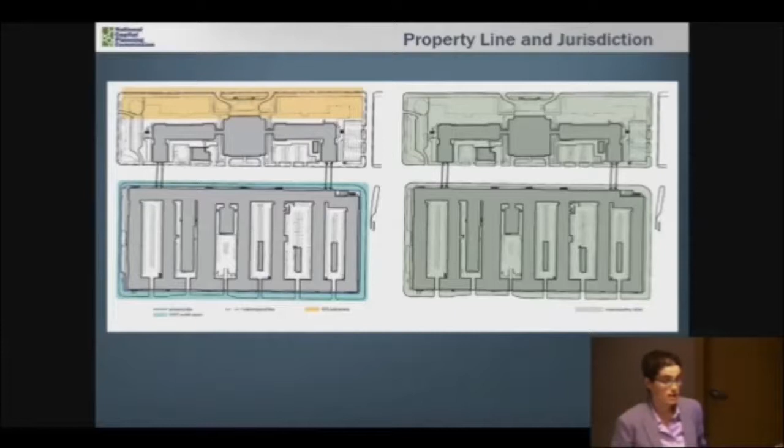To review the property lines and jurisdiction on the site, as the Whitten Building faces the mall, its north yard or lawn is under the jurisdiction of the National Park Service. The property line for the Whitten Building extends to the curb. The South Building was essentially built out to the property line, but the adjacent sidewalks are public space and under the control of the District Department of Transportation. The U.S. General Services Administration owns both of the buildings, but has delegated authority to USDA, and so the diagram on the right indicates that USDA essentially maintains both blocks.

This series of diagrams shows the evolution of the site from the late 19th century to the mid-20th century and provides some context on the development of the proposed project. In the late 19th century, the first agricultural buildings were constructed on the site. There were formal gardens located directly to the north. By the early 20th century, the diagram on the upper right indicates that the two wings of the Whitten Building were complete, and it also indicates that the 19th century landscape was still intact.

It also shows the two semicircular driveways were constructed, one to the east and one to the west. By the early 1930s, the central portion of the Whitten Building was complete. That included the ceremonial court as well as Jefferson Drive along the mall.

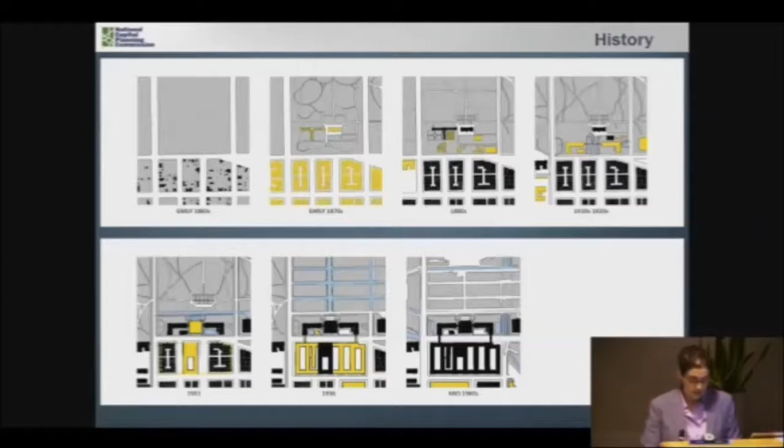Also during that time is when Frederick Law Olmsted began to be very active in working on landscape plans for the site. Olmsted had already been working on the mall given his involvement with the McMillan Commission, and the agricultural grounds were some of the first to be planted according to the McMillan Plan.

By 1936, you see the completion of the South Building, as well as the two bridges over Independence Avenue that connect the two buildings. And then finally, by the middle of the 20th century, the two semicircular driveways had disappeared, and to the east and west, you have the two parking lots.

So in 2009, to celebrate President Lincoln's 200th birthday, the Secretary of Agriculture formed the first People's Garden on the grounds of the Whitten and South buildings. The purpose of the People's Garden is to essentially connect Americans with the country's farmers and demonstrate the importance of caring for the land with sustainable practices.

Building upon the People's Garden project, the current project has been conceived of as an outdoor agricultural museum that's essentially been guided by four principles: integrating perimeter security into the landscape through the use of a cable rail system as well as some other security elements, promoting sustainability principles, enhancing the historic landscape and the Olmsted designs, and finally educating visitors about the history of USDA and the role of agriculture.

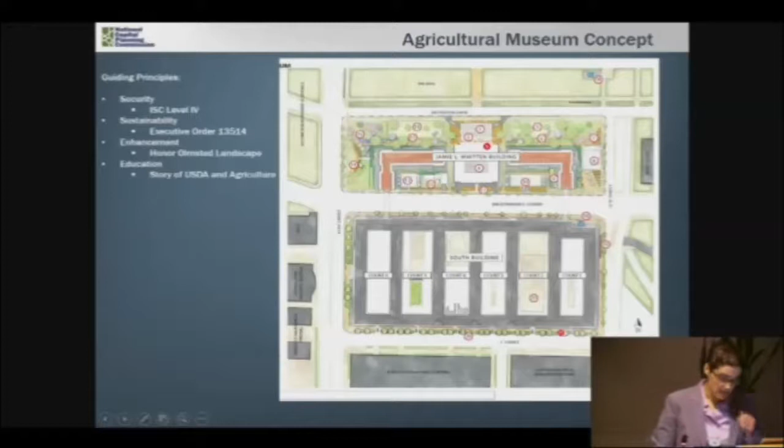At the south building, the project has slightly more limited scope, but includes streetscape improvements along Independence, to strengthen the connection to the Whitten building. It also includes the replacement of all of the guard booths currently along C Street. Finally, also along C Street, USDA is proposing to install an agricultural timeline to promote the agency's history.

The project is proposed to be accomplished over 3 phases over the course of 15 years. Essentially, phase 1 includes all of the perimeter security at the Whitten building, the modifications to the ceremonial court, as well as the west court, and it also includes the replacement of the guard booths along C Street.

Phase 2 includes the improvements on the east side of the Whitten building, the improvements to the market commons area, and then the associated upgrades to the C Street streetscape. Finally, phase 3 includes the improvements to the 2 parking lots on the south side of the Whitten building along Independence Avenue. I'll be discussing each of these in a little more detail.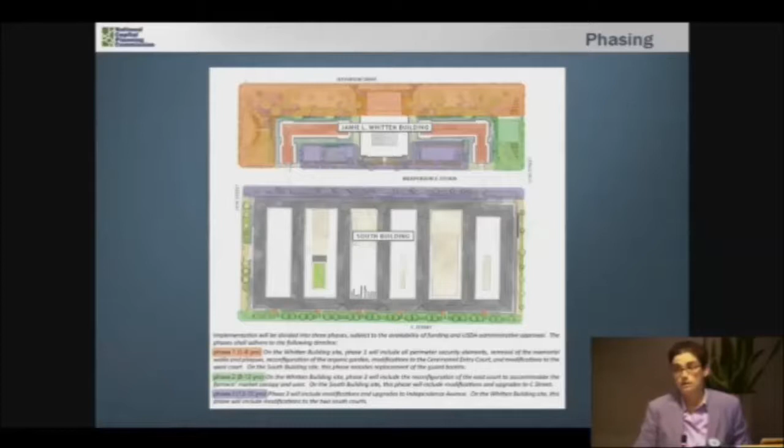For today, the Commission's being asked to provide preliminary approval for the whole project at the conceptual design phase. The individual projects will be refined and submitted at a later time for the Commission's final approval.

So to start with the ceremonial court, the design is based off of historic documentation. This space retains a high degree of integrity in terms of its original layout and use. Essentially, at the center, there's a wall that will be restored, and then 2 new additional walls based on historic designs will be added and reinforced with a cable rail system for security purposes.

In addition, bollards will be added to the stairways that are on either side of the center wall. Paving at the ceremonial court will be replaced with a permeable granite cobble paver, both to allow for water harvesting and improve stormwater management on the site.

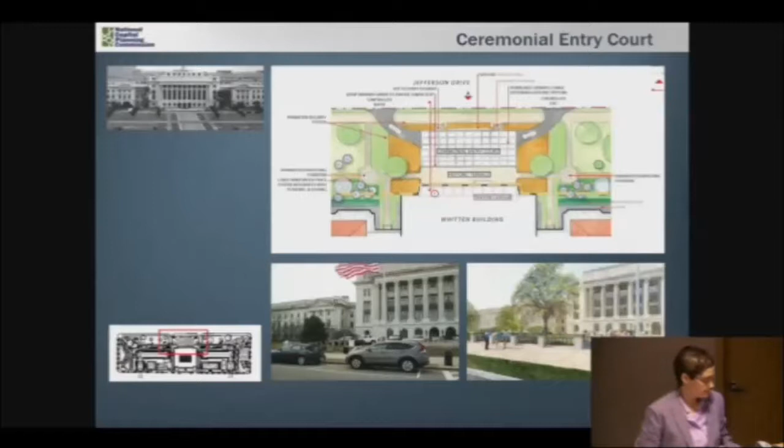Directly adjacent to the ceremonial court, 2 fountains will be added. This is for rainwater harvesting. These fountains, though, will also be added as a perimeter security element.

In addition, as I mentioned, the 2 promenades to the east and the west are proposed to be added to improve circulation throughout the site. These pathways are based on a design by Olmsted that was never implemented. As you can see in the renderings, benches are proposed to be added to provide both visitor amenity and also will function as perimeter security.

Moving to the northeast corner of the site, the current People's Garden will be transformed into what will be known as the Lincoln Teaching Garden and Market Commons. The existing parking lot that is there will be eliminated. An arced pathway that refers back to the historic curved driveway that was once on the site will be installed.

Along with some raised planting beds, a market canopy structure that you see in the bottom right here. This canopy will shelter the vendors from the farmer's market from the sun and rain, but it also has been designed to accommodate other uses and activities when the market is not in use.

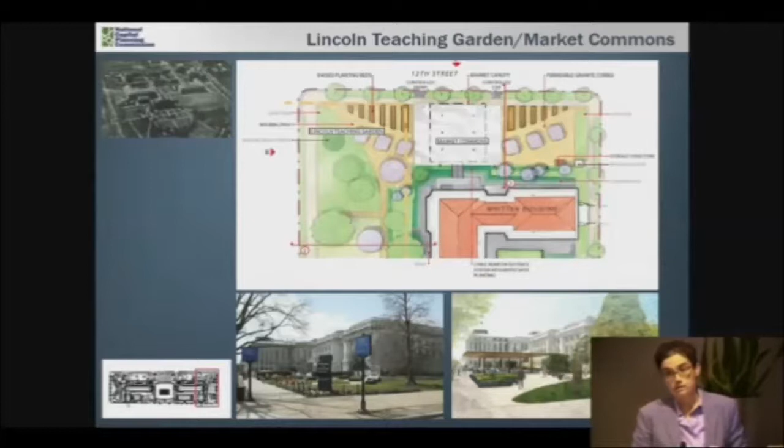Moving to the south, the east court of the Whitten building historically was used for parking, but over the long term, over the next 15 years, USDA is proposing to transform it into a multi-purpose event space that can be used for a variety of activities. They envision perhaps food truck gatherings or cooking demonstrations taking place here.

Changes that will be made: 2 curb cuts will be removed, permeable granite cobble pavers will be added, new planting beds will be installed, and again, the cable rail system will be added to provide perimeter security.

On the west court, this court will be treated very similarly to the east court. It historically was also used for parking, and it will be converted into another multi-purpose event space. USDA envisions perhaps using it to have some kind of agricultural displays in this area.

I'll point out the mechanical building located in this court already has a green roof. They're proposing to extend that green roof and install a green wall on the south and west sides of the building.

Also to highlight in this area, adjacent to where the bridge is over Independence Avenue, directly adjacent to the west court as well as the east court, this is the location where the perimeter security, due to the size of the building yard, will jump out to the edge of the sidewalk. Bollards will be used as well as benches for perimeter security in that location.

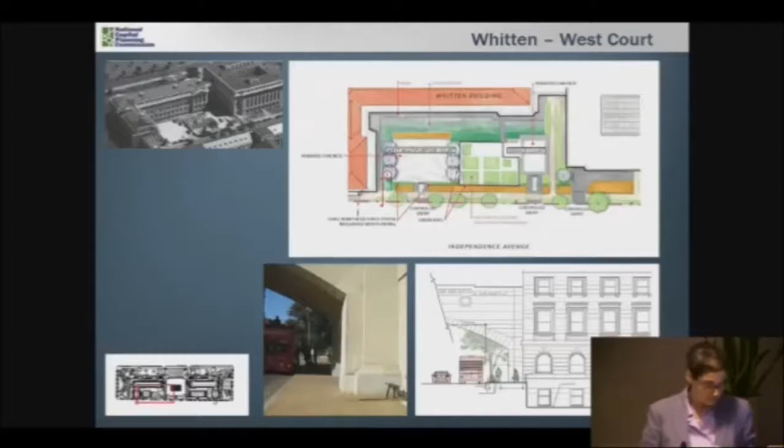Moving to the west side of the Whitten building, USDA is proposing an heirloom and pollinator garden as well as a shade garden. This space is a prominent location in the monumental core along 14th Street, has views to the Washington Monument, and USDA is planning to showcase heirloom plants and the importance of agriculture.

The idea is that this space would be a slightly more passive space for visitors to enjoy, rather than a heavily programmed space like other areas on the site. Again, you see an arced pathway and the arrangement of planting beds inspired by the historic driveway shown in the upper left.

All the parking and curb cuts will be removed from this area, and the perimeter security is proposed to be located behind the shade garden, consisting primarily of a cable rail system integrated into the landscape.

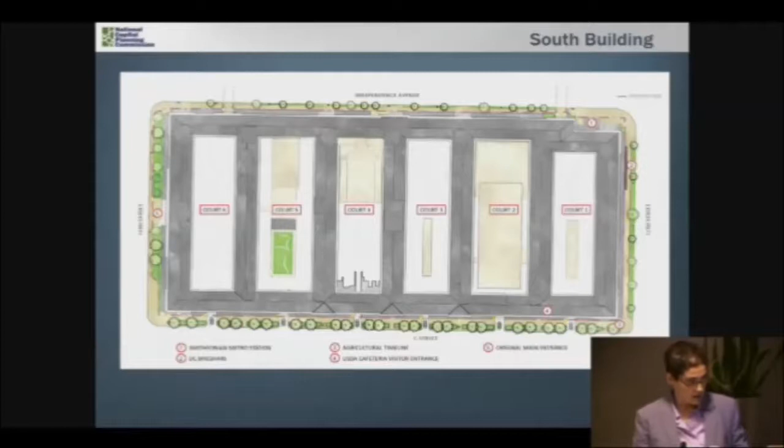Moving to the south building, the scope of work includes strengthening the street tree perimeter along Independence Avenue, adding bioswales along C Street, as well as an educational timeline, and replacing the guard booths located next to the entrances to the parking courts.

For Independence Avenue, the spatial character is well defined by the facades of the two buildings. Historic documentation indicates that street trees were once an important element of the streetscape; however, the trees are currently in very poor health. The goal of the current project is to reestablish a framework and physical conditions that will allow the street trees to mature, acknowledging the importance of Independence Avenue.

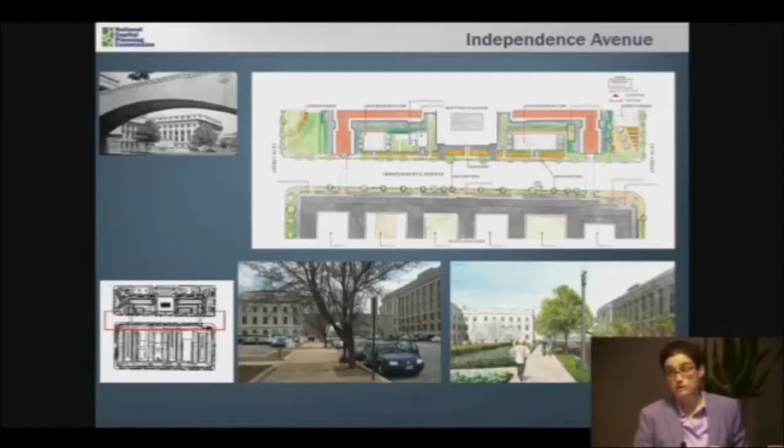Along C Street, as mentioned, the existing guard booths will be replaced with booths more compatible in design with the architecture of the south building. The new booths will also meet security standards and allow the guards to be more comfortable as they perform their duties.

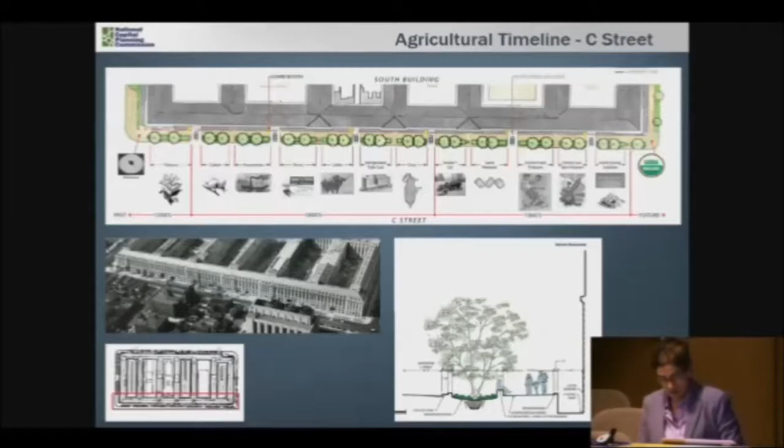Here you can also see the plan for the proposed agricultural timeline along C Street. This will be integrated into the new bioswales proposed, aiming to essentially green up this part of the street. As you can see from the historic photograph, at one time there were planting beds and trees located along this block.

Moving into staff's analysis, we found the project to be overall consistent with several elements of the comprehensive plan. We focused our analysis on the location of the perimeter security, as well as the proposed reduction in parking at the Whitten building, the incorporation of sustainability features, and the rehabilitation of the historic landscape.

Also, USDA has completed an environmental assessment that concluded in the signing of a FONSI, or finding of no significant impact. USDA has also been actively leading a Section 106 consultation and is working to formalize and execute a memorandum of agreement to address the adverse effects.

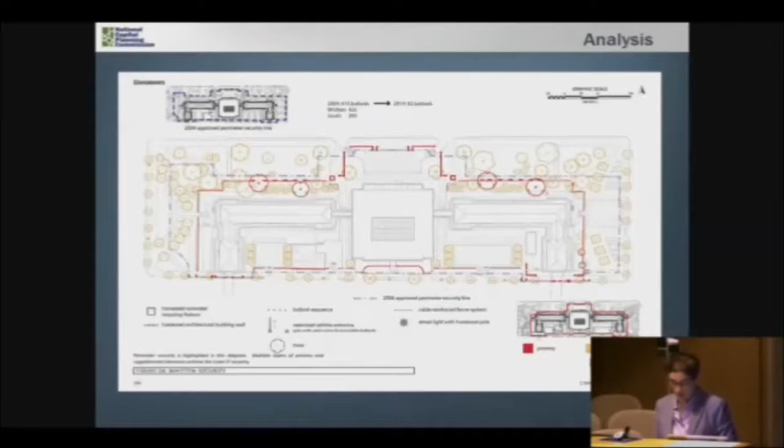As far as the location of the perimeter security, as mentioned, it's primarily within the building yard, with the exception of limited locations along Independence adjacent to the bridges connecting the Whitten and South buildings. In 2004, the Commission approved a previous proposal that was never implemented, consisting primarily of a system of bollards running around the edges of the site, including protecting the parking on the east and west sides of the Whitten building.

The current proposal both pulls back that perimeter security line so that the west and east sides of the Whitten building are able to provide a public benefit in the form of a garden on the west and a market space on the east, but also calls for the use of a cable rail system integrated into the landscape. In addition, there are a variety of other elements, such as fountains by the ceremonial court, as well as benches, being used to reduce the visual impact of the perimeter security on the site and surrounding streetscape.

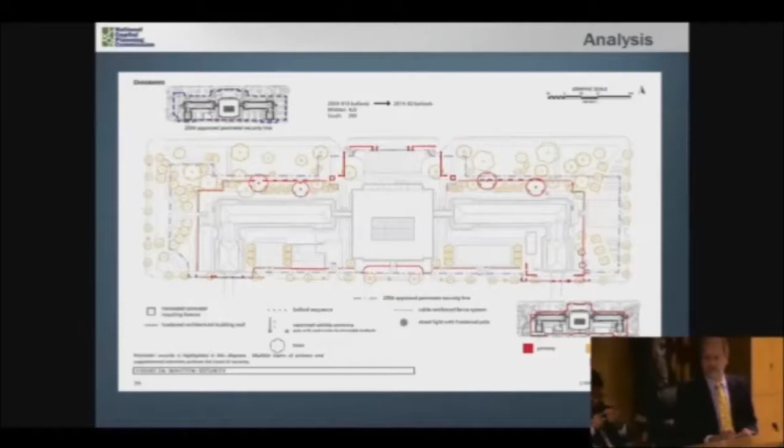So I've heard you describe, are there renderings of the perimeter security? Because a cable rail integrated into the landscape can mean a lot of things. I've shown most of the renderings we have. We don't have anything in a lot more detail. Again, this is for preliminary approval at this time. It'll be developed further before it comes in for final approval.

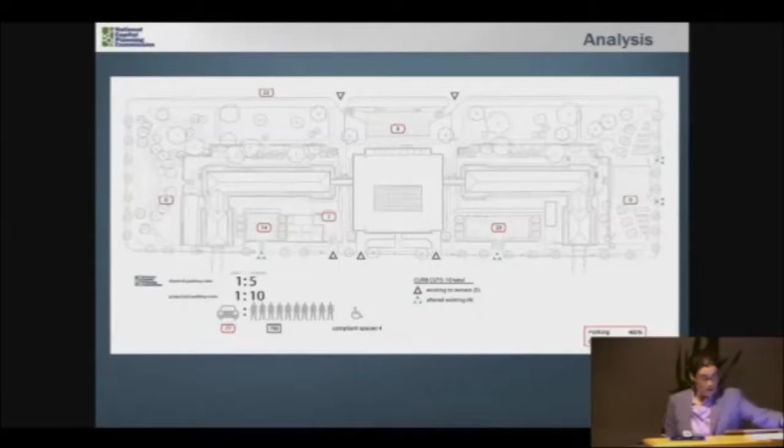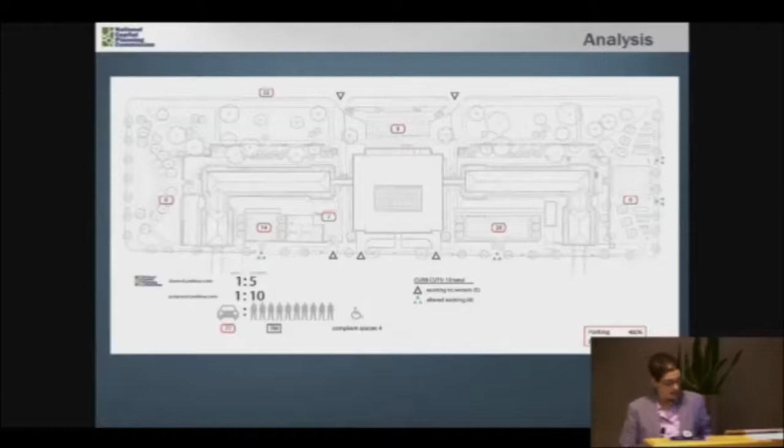So regarding the parking, USDA's efforts are commendable in terms of eliminating the parking from the east and west sides of the building. Staff would like to see the parking proposed for the ceremonial court also eliminated. We feel that with this project, there's an opportunity to remove all of the parking from the site that faces, particularly the part of the site that faces the National Mall. Obviously the court will continue to be used for ceremonial drop-offs and pickups, but the vehicles can be parked at other locations on the site. So therefore, staff is recommending that the commission request that USDA eliminate these 8 parking spaces.

Regarding the planting plan, USDA is proposing to retain most of the historic trees on the site, but they're also proposing to introduce species including fruit and nut-bearing trees, particularly along parts of 12th and 14th Streets. That planting design follows an approach to achieve a sustainable urban harvest. While staff is supportive of that approach, we are recommending that the commission note that the treatment of the streetscape, including the selection of street trees and paving materials, should both establish a cohesive design palette and be consistent with local standards.

Finally, regarding the west side of the Whitten building, staff is aware that Congress has authorized the National Mall Liberty Fund D.C. to establish a memorial in the district or its environs to honor the more than 5,000 slaves and free black persons who served as soldiers or provided civilian assistance during the American Revolution. Pursuant to the Commemorative Works Act, if the fund wishes to consider sites within Area 1, either the Secretary of the Interior or the Administrator of GSA must, after consulting with the National Capital Memorial Advisory Commission, make a determination that the memorial is of preeminent and lasting historic significance to the country. This past December, the fund did present to NCMAC, and NCMAC found that this memorial was of preeminent and lasting historic significance. During that meeting, the fund also identified the west side of the Whitten building as their preferred site. So therefore, staff is recommending that the commission commend USDA for developing a flexible design for this portion of the site that could be modified to accommodate a memorial on the site.

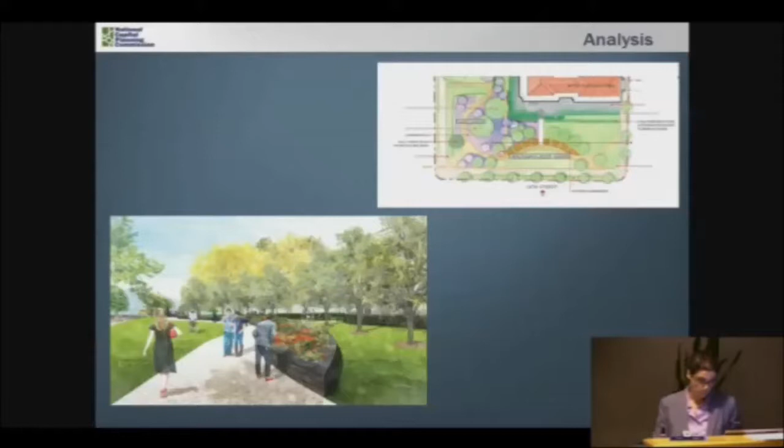So with that, it is the executive director's recommendation that the commission approve the preliminary site and building plans for the People's Garden site improvements and perimeter security project at the USDA headquarters, adopt the USDA finding of no significant impact for the environmental assessment on the project, request that USDA eliminate all the parking from the ceremonial court along the National Mall, note that the treatment of the streetscape, including the selection of street trees and paving materials, should both establish a cohesive design palette and be consistent with local standards, and finally commend USDA for developing a design that is flexible and could accommodate a memorial on the west side of the Whitten building. That concludes my presentation.

Thank you, Ms. Hirsch, very much. We do have one speaker in the public comment section. We have Mr. Maurice Barboza, representing the National Mall Liberty Fund, D.C. Welcome, we're glad you're here.

Thank you very much. It's a pleasure to be here. The last time I was here was in 1987, talking about a project to honor African Americans who served in the Revolutionary War. Mr. Chairman, members of the commission, I just want to give you a little background on this.